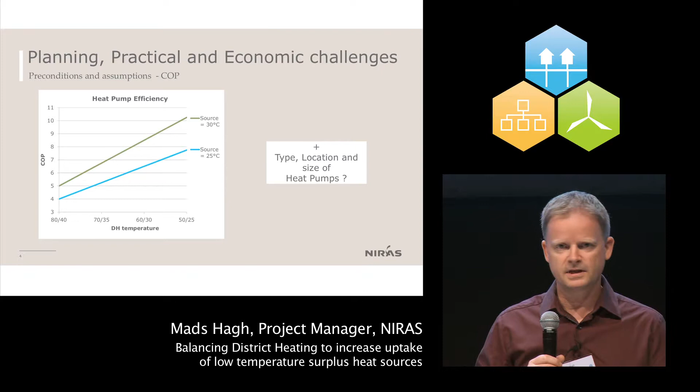Another is to find out the efficiency of the heat pumps. On the one slide is the efficiency based on actual implemented plants, and when we consider the low temperature, we expect an efficiency between 7 and 9. And for the specific project, a model had to be developed where all the heat pumps are located, finding the total system efficiency. And in this case, it was 8.3.

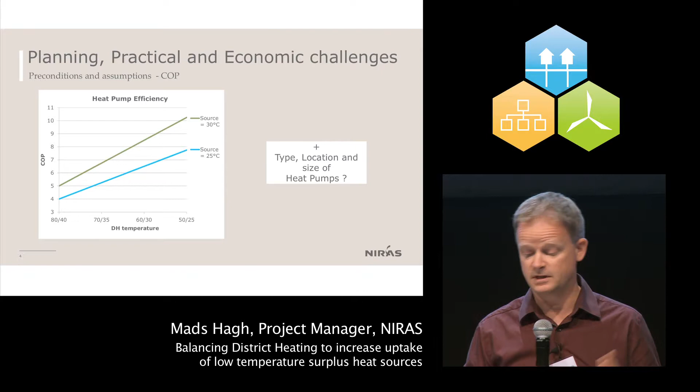Then another big task was to set up all the different scenarios and different ways of combining the system. The three major solutions were to have only heat pumps at Apple, sending the high temperature into the city. Another scenario was to have a mixture of heat pumps at Apple and then in the peak load centrals in the city, taking a second boost. And the third one is only in the city, sending in the low temperature.

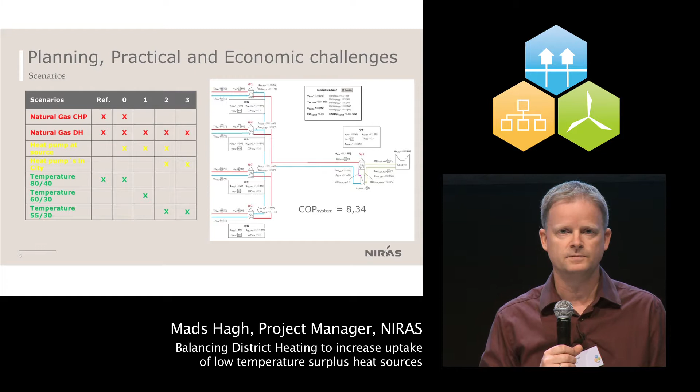There will of course be very little heat loss, since it is distributed with 30 degrees. But in this case, it will be a very big pipeline, so there is the economy between these three solutions. And we found that the mixture was the cheapest one, with the lowest cost.

And for the conclusions and what Viborg has to do to actually cope with this, one is splitting the city into zones, which Morten already spoke of earlier. One for the center and one for the surroundings, with two different temperatures. And then in the center, as I said, the peak load centrals have heat pumps boosting the heat. And at larger consumers in the low temperature area, also heat pumps to boost the temperature for these specific large consumers.

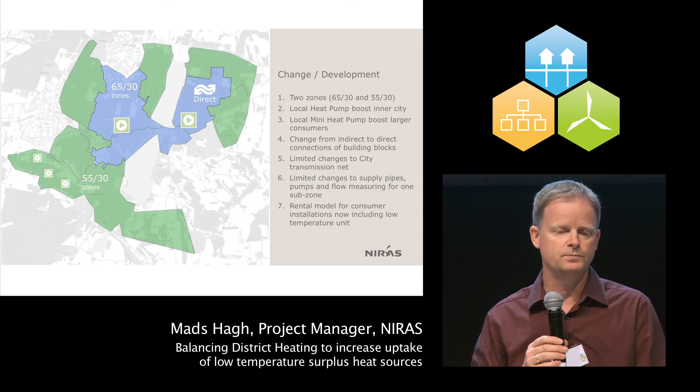Then there are a few changes to the net in this specific case. One is a direct connection of the big building blocks instead of indirect with heat exchangers. And in one zone, there was a change of distribution between two pipes and some local distribution which has to be changed. But in this specific case, it was actually limited how much had to be changed. Also, the last distribution net around the city had a few places where the dimension has to be changed.

Of course, we have to use our time now to prioritize all the investments, which things have to be invested in first, and time schedules and investment plans. We have to negotiate ownerships, who is going to operate what part of the plants, and then there is the issue of the preconditions.

As I mentioned before, the electricity prices are ever changing, and so is the base for the socioeconomics. They are also changing all the time, and this has some influence on the economy of the project. In general, the electricity prices have been lowered, so it's only making the project better. And then there is a general optimization of all the systems. These are the things that have to be done in the near future and are on the way.